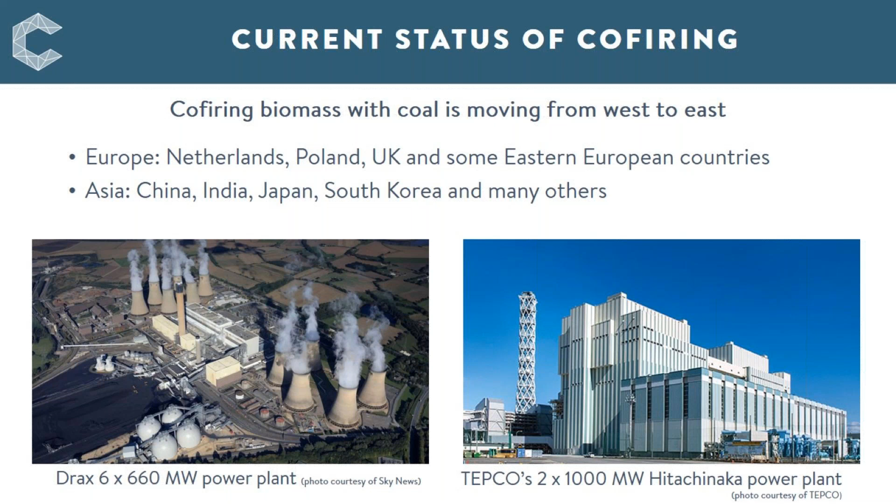Meanwhile, co-firing in Asia is expanding fast. At IEA-CCC, we have studied co-firing for many years and published reports on various aspects of this subject. My study is an update for the previous report.

The major types of biomass fuels for co-firing with coal are wood, grass, and straw-based. Imported wood pellets are the main biomass co-fired in Europe. In Denmark, a large amount of local straw has been used. Japan and South Korea mainly co-fire imported wood pellets, although Japan also co-fires waste wood. In China and India, agriculture waste is the main fuel. This is a win-win as it reduces the local pollution from burning crop residues as well as reducing CO2 emissions from coal-fired power plants.

This figure shows heating values and steam temperature of various biomass. We can see agriculture residues have low steam temperature and heating value, hence it is more challenging for co-firing. Also, wood chips and pellets, especially pretreated ones, have similar characteristics and are more uniform than crop residues, therefore have less impact on the power plant.

For residues like straw, deposition and corrosion issues are more of a problem, so specific strategies are needed for high ratio co-firing. For example, IFK at University of Stuttgart recommended a straw ratio of less than 25% for minimum impact on the boiler. They also suggested using an online probe for monitoring conditions in the boiler.

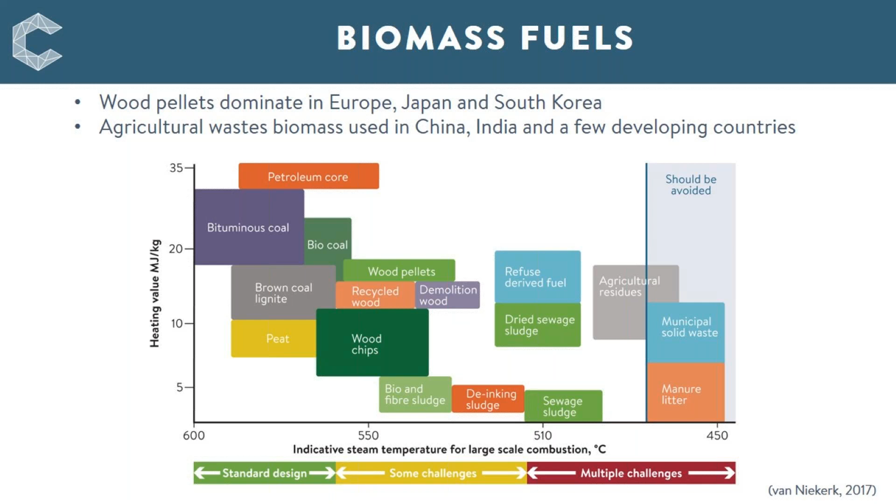Much effort has gone into developing efficient and cost-effective biomass pretreatment technologies to improve the physical and chemical properties and the energy density of biomass. Common pretreatment technologies include washing and leaching, steam explosion, torrefaction, wet torrefaction, and densification.

Leaching or washing the biomass with rainwater, tap water, or acidic or alkaline solutions is an effective way to remove troublesome elements. Bioleaching has attracted attention recently. Laboratory results show it is more efficient than water for removing most contaminants except sodium.

Steam explosion has been widely used in the production of bioethanol. It is now being used to pretreat biomass for power generation. Pellets from steam explosion are easier to mill in large coal mills, which minimizes retrofitting cost at a coal-fired power plant. Research has also been carried out on various feedstocks such as rice straw, corn stover, or coffee husks. Valmet took the steam explosion technology to the pilot scale with its BioTrac system, as shown in the photo on the right.

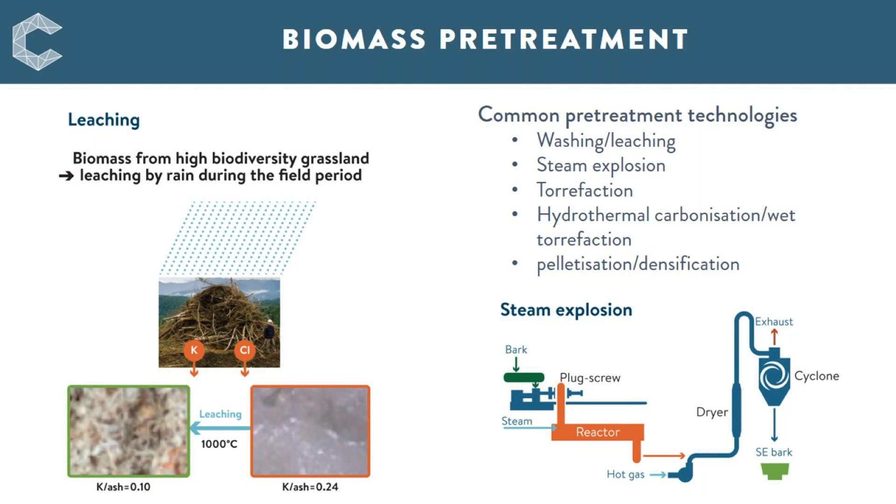Torrefaction is currently the most active area in biomass pretreatment. It is a popular research topic in the last 2 decades. The figure here shows that torrefied biomass has many improved properties compared to raw biomass.

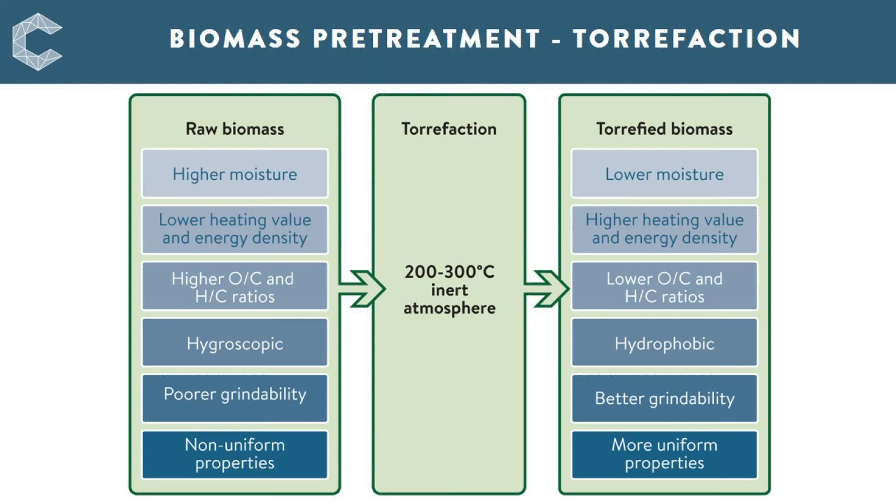Several companies are trying to commercialize torrefaction technology. The initiation of commercializing took off in 2010 to 2011, and quite a few plants were planned. There were 65 companies working on biomass torrefaction globally in 2017, and many of these are still in operation. Even so, the deployment of torrefaction technology has not been fulfilled as fast as originally expected. Steady industry production and the commercial status have not yet been established, although torrefied biomass is widely available in the market.

Many reactor concepts have been considered for biomass torrefaction. Here's a collection of torrefaction reactors available in the commercial market, which have been deployed at torrefaction plants.

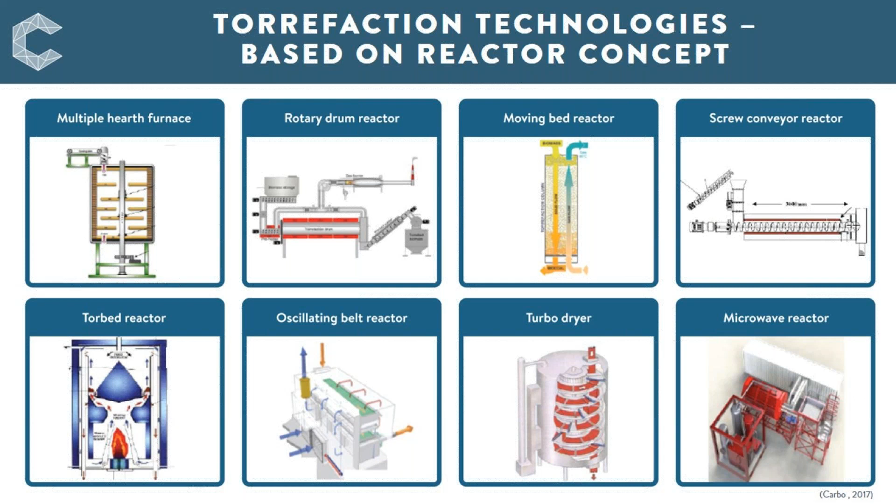To maximize the benefit of biomass pretreatment, two or more technologies are often combined. For example, ECN in the Netherlands has developed and patented TORWASH, which combines washing and torrefaction to improve low-grade biomass feedstock.

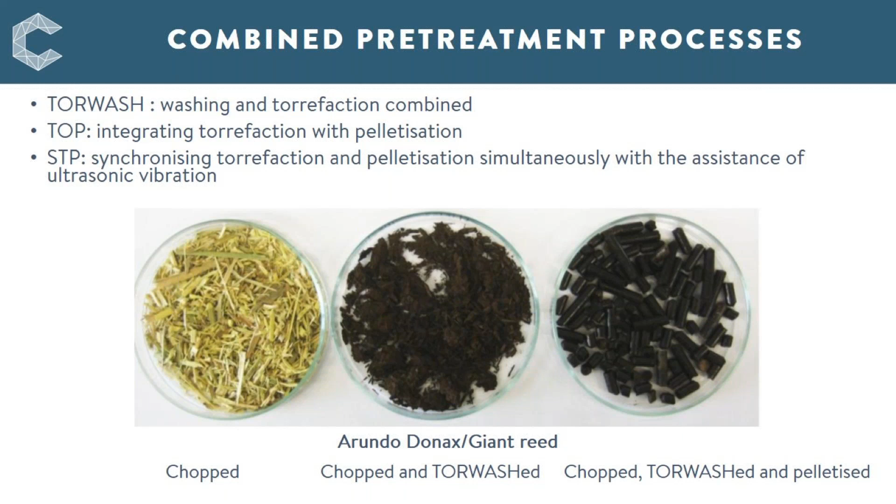Torrefaction can also be integrated with pelletization, referred to as TOP.

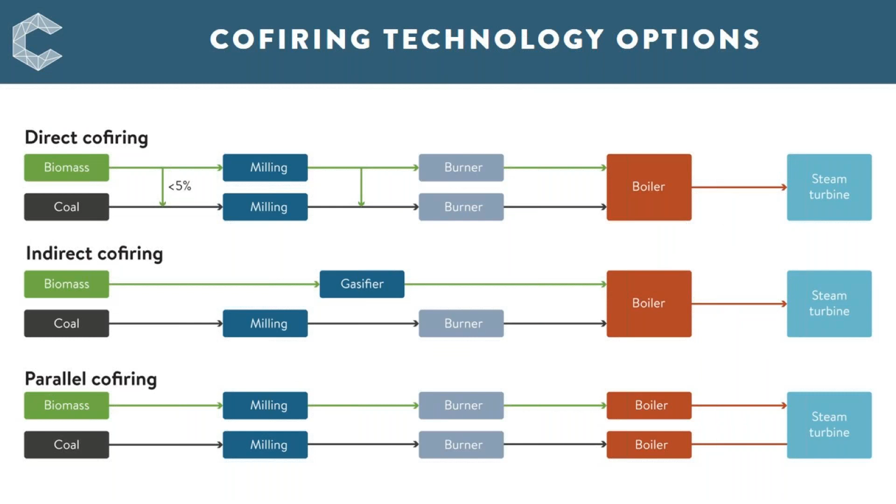Now we move on to co-combustion of biomass and coal. Co-firing technologies are commonly classified into three types: direct co-firing, indirect co-firing, and parallel co-firing, as illustrated here.

Fluidized bed boiler is most suitable for co-firing. Existing coal-fired FBCs can be easily adapted to co-firing. In general, FBC boilers can substitute a higher level of coal with biomass and handle biomass with higher moisture content and a larger particle size than PC boilers.

They can achieve high efficiency, typically over 90%, even with challenging low-grade fuels. FBC co-firing can reduce the amount of ash discharge and limestone consumption. One problem with FBC, though, is the increased likelihood of bed agglomeration occurring.

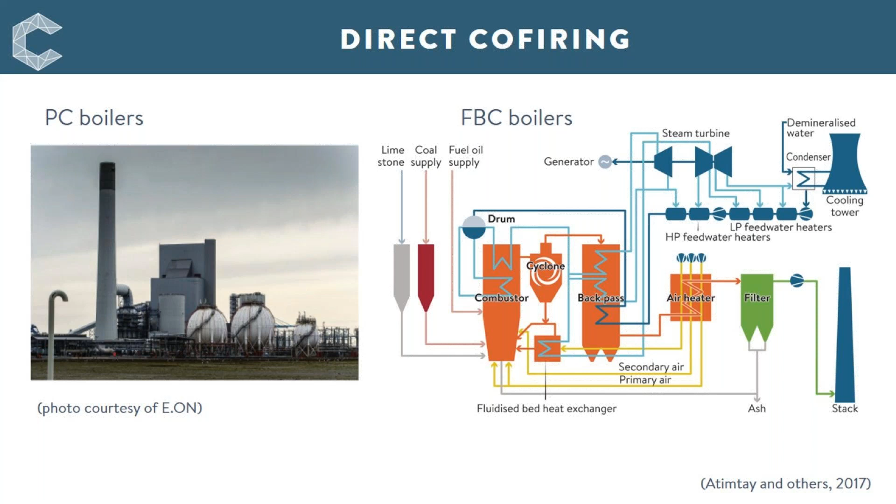The commonly known indirect co-firing technology is coupling a biomass gasifier with a coal boiler. There are many advantages to this setup, but it has not been widely adopted in Europe, largely due to the expense.

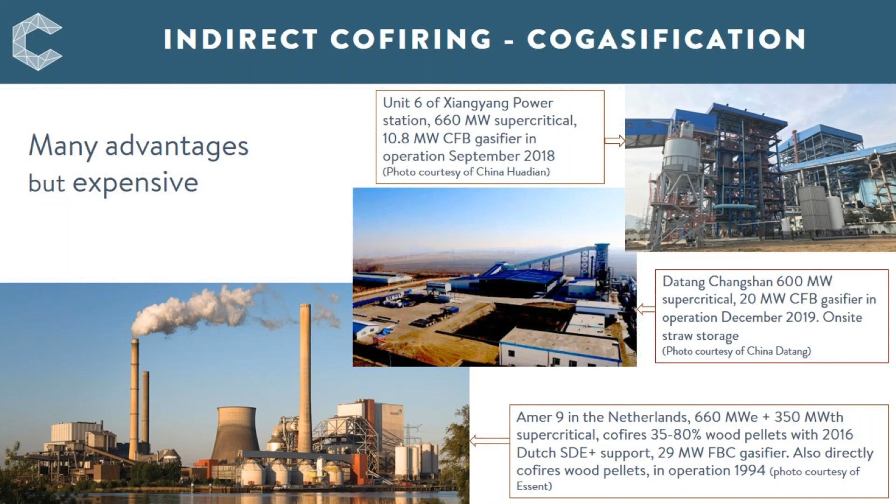Optimizing the ratio of biomass to coal for cofiring has always been a goal. Drax in the UK tried various cofiring ratios before converting its unit to 100% biomass. Amer 9 cofired 50% wood pellets last year and plans to move to 80% this year.

This figure shows the cofiring ratio for 40 cofiring units in Japan. 31 of them cofire less than 3% biomass, shown in the blue column. 8 units are cofiring above 3%, with 5 above 20%. But many Japanese companies have been working on how to increase the cofiring ratio.

In the test launched in January 2018 at the Suma Energy Park power plant, a ratio of 34% at rated load and 50% at partial load were achieved.

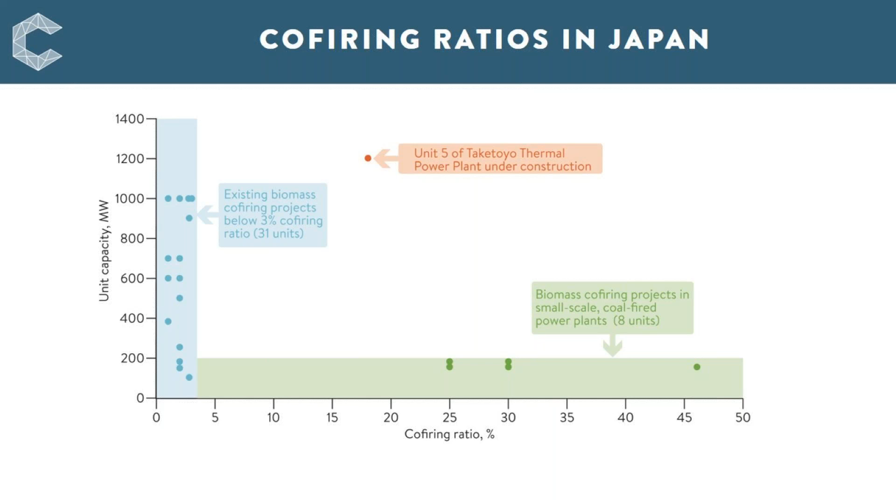The European Commission's BiOxySorb project published a report in 2018. This demonstration program included oxy-fuel coal-firing research at the lab and pilot scale at the IFK at the University of Stuttgart. Large-scale tests were carried out in a 20 megawatt facility by CIUDEN in Spain.

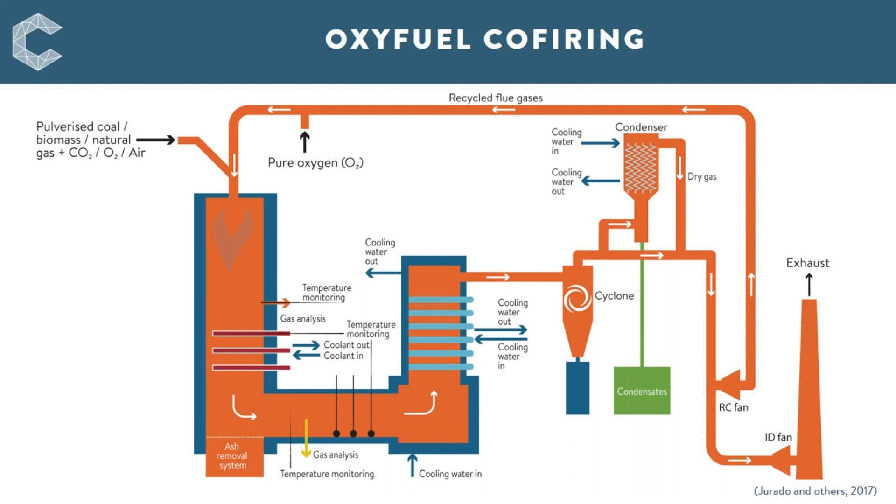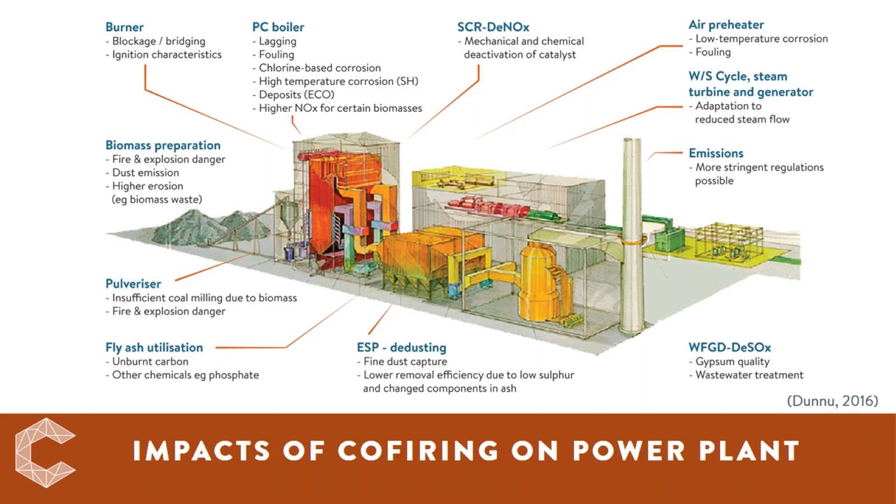Despite pretreatment of biomass and whatever combustion method and biomass ratios are used, cofiring biomass has impacts on coal-fired power plants, on the combustion, operating logistics, and environmental control systems, as summarized in this slide.

I'll start with operating issues. There are 3 different routes for milling. They can be co-milled, or milled separately and combined at the burner, or milled separately and burned separately. When milling for cofiring, especially in the co-milling route, the biomass ratio must be considered, generally up to 20% biomass. Fuel grindability, mass balance, and heat balance also need to be considered.

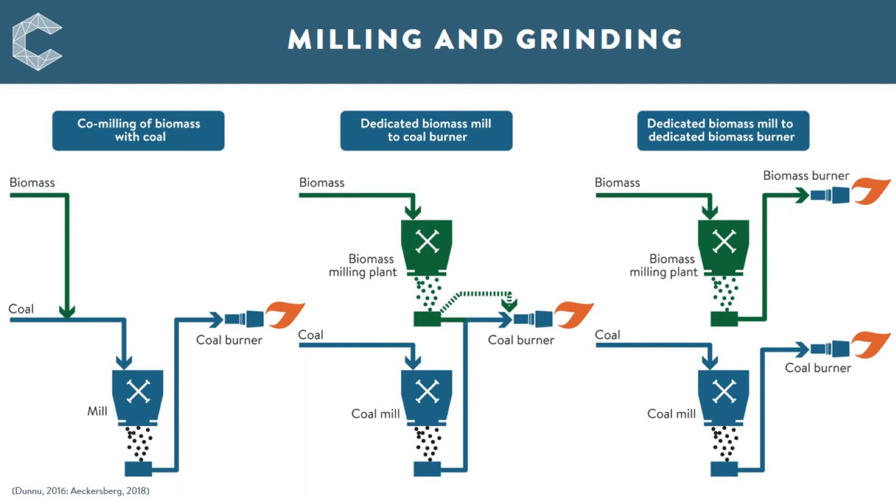Loesche Energy Systems Limited is the market leader in design and supply of mills. Their key product is a vertical roller mill. The burners may require modification.

This example is Unit 3 of Studstrup CHP plant. The coal mill and burner were modified in 2017 to prevent load decreasing. Additional flame scanners were installed to solve the flame detection problem. Minor changes were made to the existing ignition system to enable continuous operation at low load. The oil ignitor has been replaced by a plasma burner. Oil nozzles have been replaced by smaller ones.

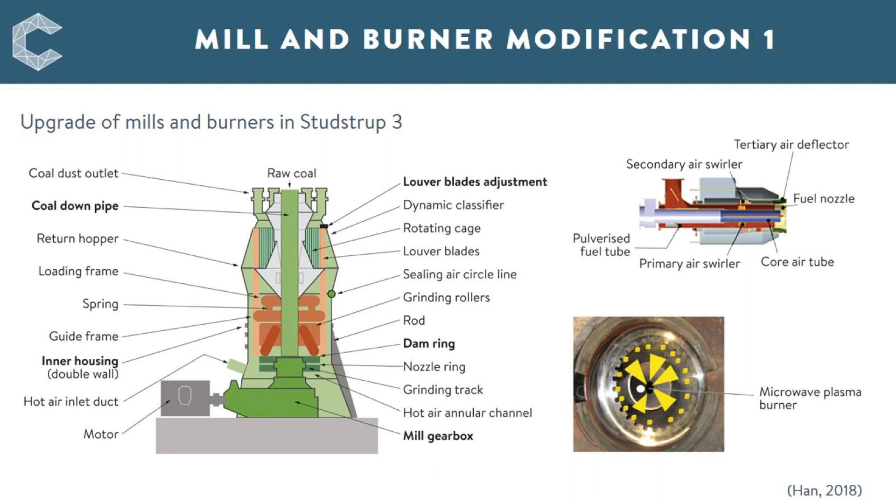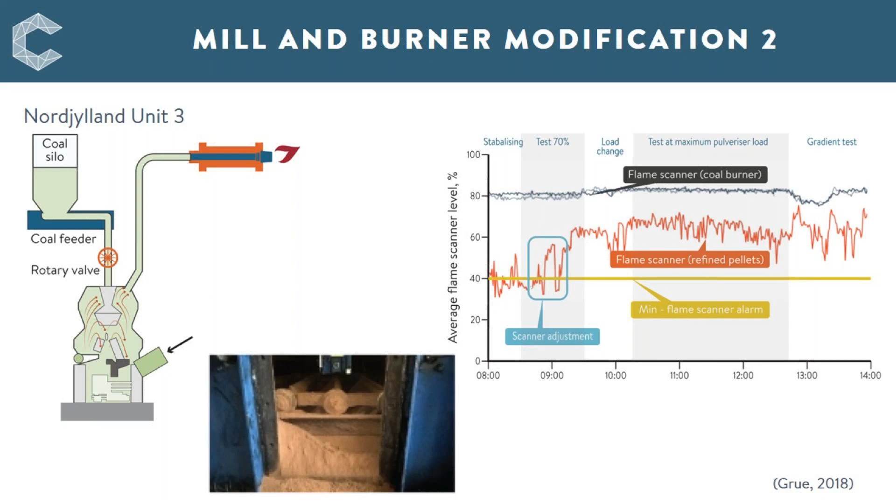Another example is Unit 3 of USC Nordjylland plant. The issue here was that coal forms an airtight seal in the silo, but processed pellets don't, so dust can flow from the pulverizer to the feeder and eventually block it. To prevent this, a rotary valve has been installed. A biomass flame is slightly different from a coal flame; adjustment of the flame scanner was sufficient to ensure safe operation of the pulverizer.

These models are available for air and oxy-fuel conditions. The recent trend is modeling oxy-fuel cofiring and CFB modeling in 3D.

State-of-art CFD-based models can solve the complex interdependent processes like fluid flow, turbulence, heat transfer, and heterogeneous and homogeneous chemical reactions involved in coal combustion. However, the complete description of particle trajectory, chemistry of devolatilization, char oxidation, and volatile combustion is still mainly based on simple models. To ensure the simulation is adequately completed, CFD models need to be validated with experimental data.

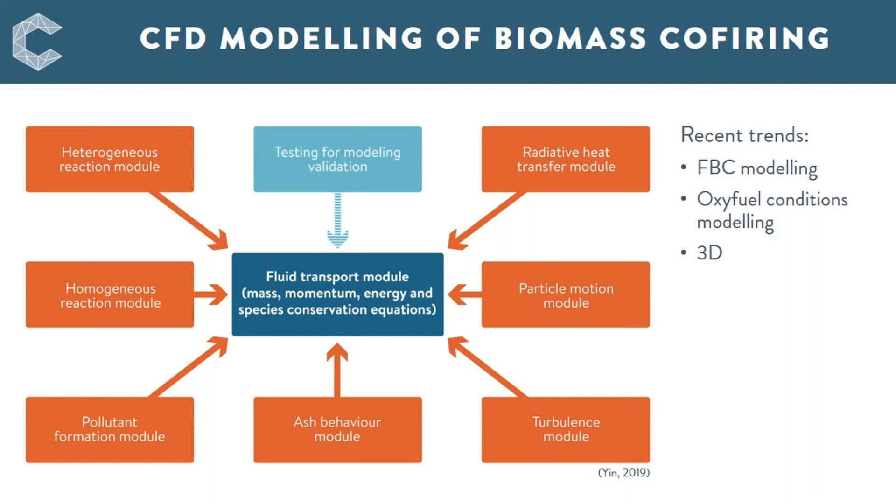The alkali and alkaline earth metals react with other inorganic non-metallic components to produce deposit. The common ones include silicates, chlorides, and sulfates of potassium and calcium. These compounds are more concentrated in agricultural waste than wood pellets. The deposit leads to slagging in combustors, fouling of heat transfer surfaces, and bed agglomeration in fluidized bed combustors.

Ash deposition is also affected by physical properties. To reduce slagging and fouling, as mentioned earlier, CFD modeling can help understanding of ash deposition.

Alkali carbonates can be used as a sorbent to reduce hydrogen chloride. Combustion additives such as kaolin can be used to change the ash composition and further reduce the presence of volatile alkali species. Fortunately, the potassium chloride and sulfate components of biomass are mainly water soluble.

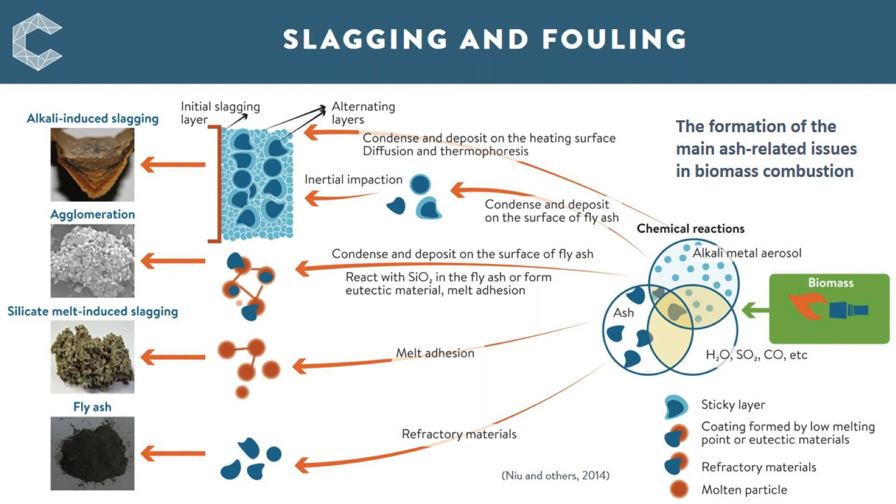Co-firing herbaceous biomass with low fouling tendency coal such as lignite reduces slagging in PC boilers and slagging and bed agglomeration in FBC boilers. Fouling can be controlled by the use of online cleaning systems.

Some biomass, such as agricultural waste, have high alkali and/or chlorine content, or both. Co-firing them, particularly straw or switchgrass, can exhibit a corrosion problem. Chlorine in combustion gases, especially at high temperatures, can accelerate the corrosion of combustion systems and flue gas cleaning systems.

The same corrosion prevention methods used in boilers can be used elsewhere, such as modification of the reheater and superheater, in order to allow larger spacing, more soot blowing, and lowering the live steam temperature to below 500 degrees, and so on. Other ways to minimize corrosion include the use of more corrosion-resistant

high corrosion-resistant alloyed materials such as Sanicro 25 and 28. Chromium-based or nickel-based diffusion coating can be applied for protection.

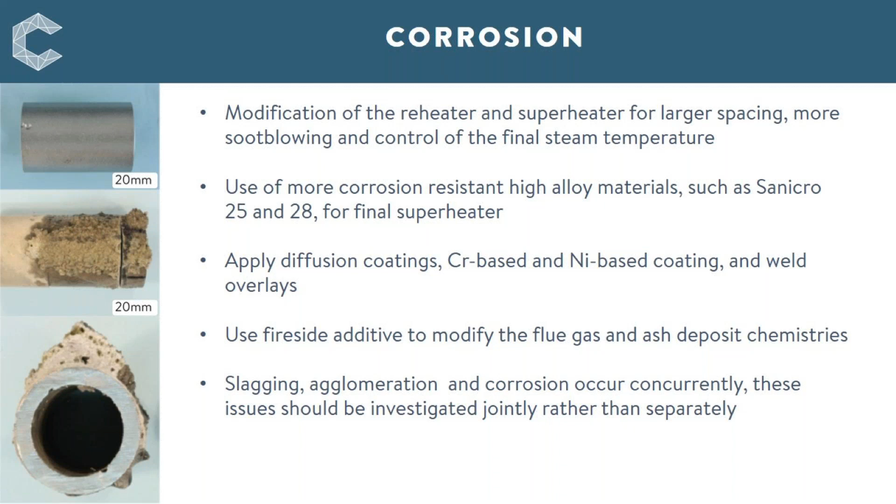The risk of fire and explosion is an important issue for biomass co-firing. Biomass has a low ignition temperature and high reactivity, making it harder to handle than coal. Torrefied wood is more brittle than untreated biomass, giving it a greater chance of exploding.

The factors affecting explosion include particle fineness, high reactivity of dust materials, high concentration of dust in air, low ignition temperature of dust particles, proximity to a high energy ignition source, and a favorable oxidizing environment.

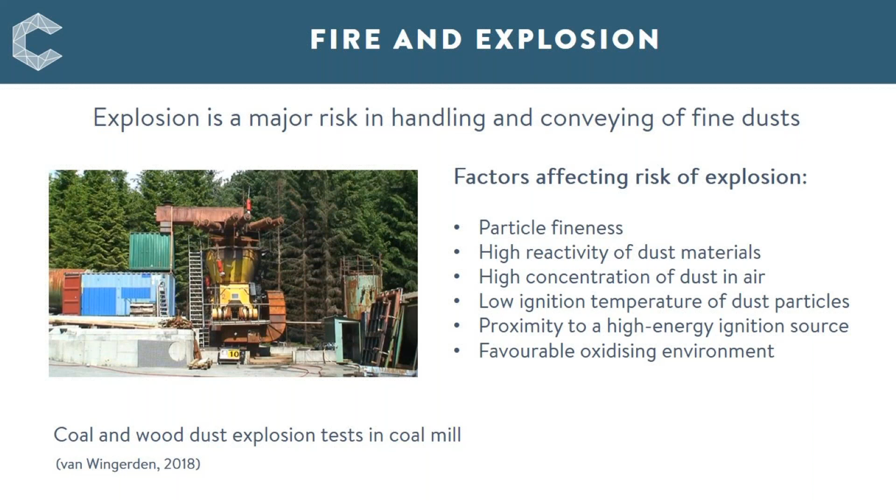Apart from CO2 reduction, co-firing can bring a positive emission reduction from a coal-fired power plant. Most biomass fuels have a lower ash content than coal, so in general, co-firing reduces the total amount of fly ash produced. But in some cases, an increase or non-change in the amount of PM has been measured.

The effect depends on the type of biomass and the performance of PM collection equipment. Fly ash particles from biomass combustion tend to be significantly smaller than coal fly ash. The capture efficiency of ESPs tends to decrease with an increasing co-firing ratio.

With co-firing biomass, SO2 emissions invariably decrease, often in proportion to the amount of biomass co-fired. NOx emissions are harder to predict and vary with the biomass used and the manner in which the nitrogen is released. However, there's evidence that co-firing can deactivate SCR catalysts.

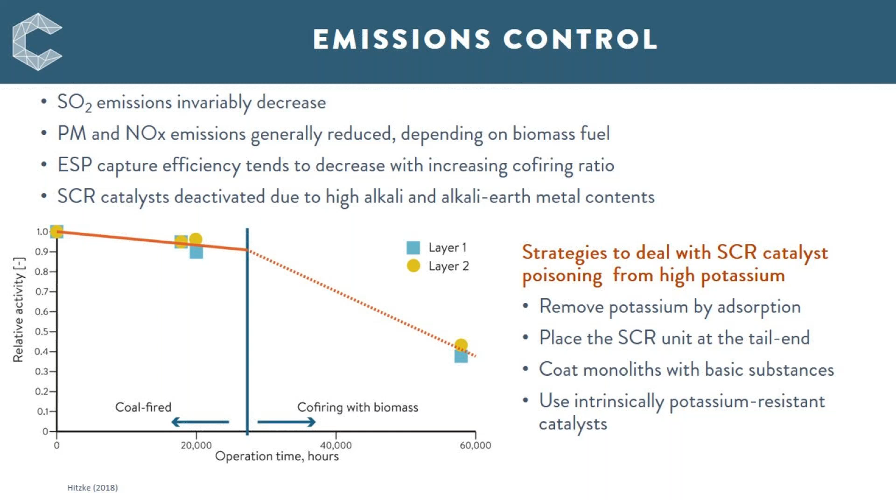As mentioned, there's an overall reduction in fly ash production from co-firing power plants compared to coal plants. The ash contents from different biomass and coal differ in composition. This creates a burden for utilizing the fly ash from co-firing, especially at high co-firing ratios.

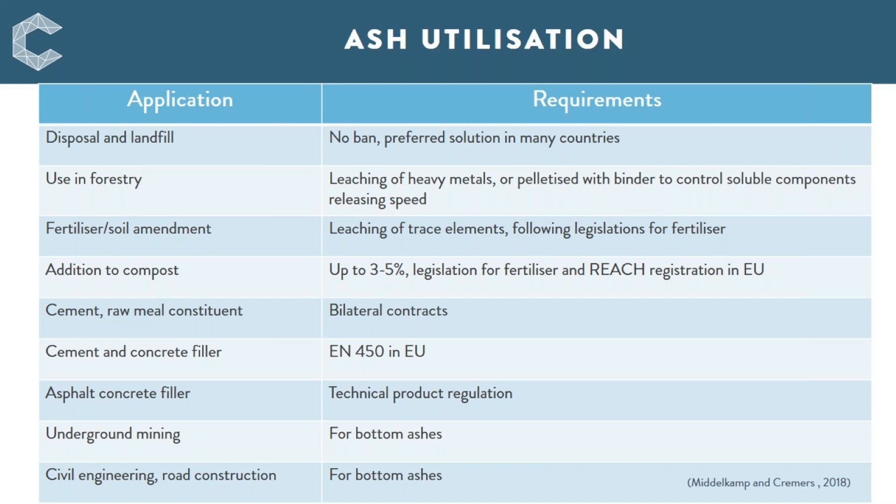On a worldwide level, no or a limited number of guidelines with best practice have been developed in ash management. This table lists biomass ash application and requirements based on a survey conducted by IEA Task 32.

To summarize, co-firing biomass has been practiced in Europe for more than 20 years. Some of the technologies are commercially mature. Agriculture waste are more commonly used in Asia, which reduces local air pollution. But high alkali content can cause more issues with slagging, fouling, and corrosion. Methods to prevent and reduce these drawbacks are being developed.

Biomass pretreatment is often used. Some pretreatment technologies are in or close to commercial operation but can be expensive. Overall energy efficiency should be considered when choosing a pretreatment method. Biomass handling requires care due to the risk of fire and explosion.

Direct co-firing of biomass in large PC coal-fired power plants is still the most popular choice, although FBC boilers are more suitable for co-firing. Co-gasification co-firing is the main method in China. Oxy-fuel co-firing with biomass has the potential to reduce CO2 emissions dramatically. Progress continues to be made to facilitate co-firing biomass with coal, but it comes at a cost, hence requires governmental support.